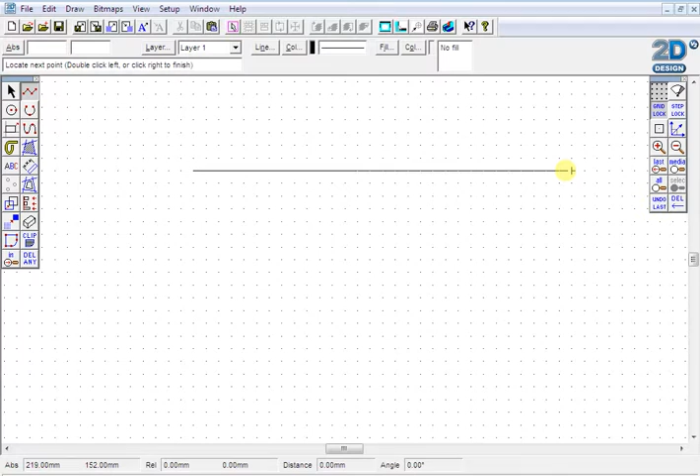And then I can come down by 5 millimeters. Just quickly finish off that rectangle, and then press escape on your keypad to finish off that line.

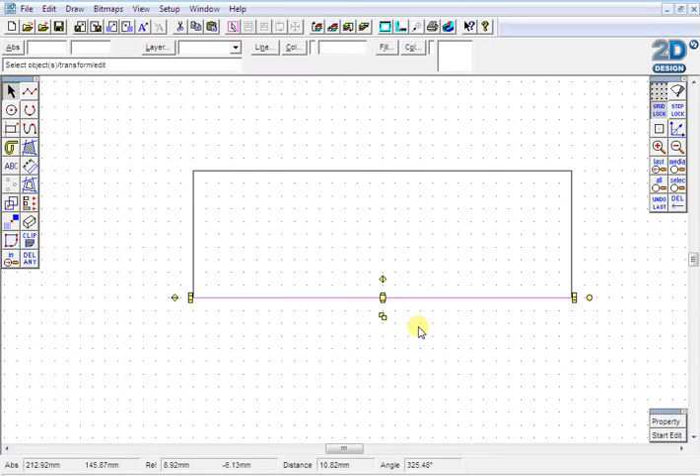Now, next step is to locate where that center point is on that bottom line. I tend to just click on the line and then place my finger gently on the screen to locate that point. Go to the line tool and click where my finger was previously.

I'd like you then to come up by 1 millimeter, press enter, and then escape to finish that line. And I'd like you to draw 2 circles that have their center located on the end of that line.

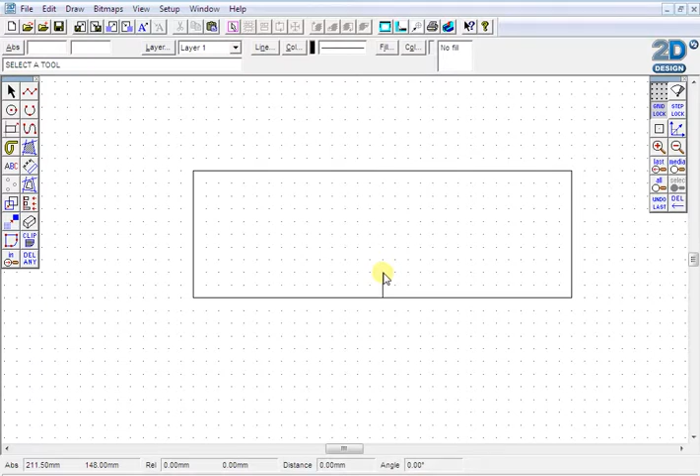So click and hold down the circle tool, click on the second one in, draw a circle with a given center and radius. Type in the radius to be 1.22, click OK, and click the center, the end of that line.

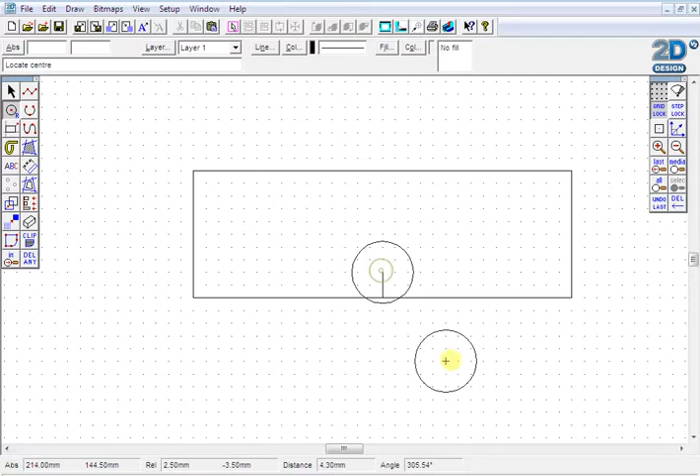Go back to the select tool, back to the radius tool, and change that radius from 1.22 to 2.92. Press OK and click in exactly the same place as before. Press escape on your keypad to finish that off.

Next up, I would like you to draw a line that is 2.5 millimeters above this baseline here. But instead of actually drawing the line, we can just use the contour tool.

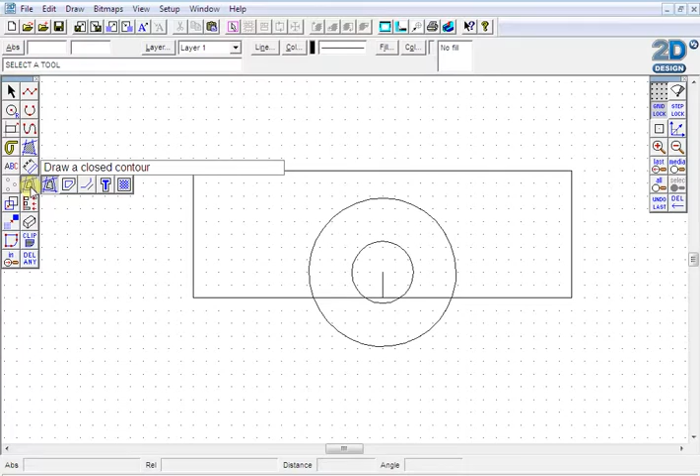Click and hold down on the contour tool, select the third one in, draw a contour parallel to a line, arc, circle or curve. Type in the distance to be 2.5 millimeters.

Click just above that horizontal line, that is just above. If you're too close to the circle, then it will contour that circle rather than the line that you want. And there we have it.

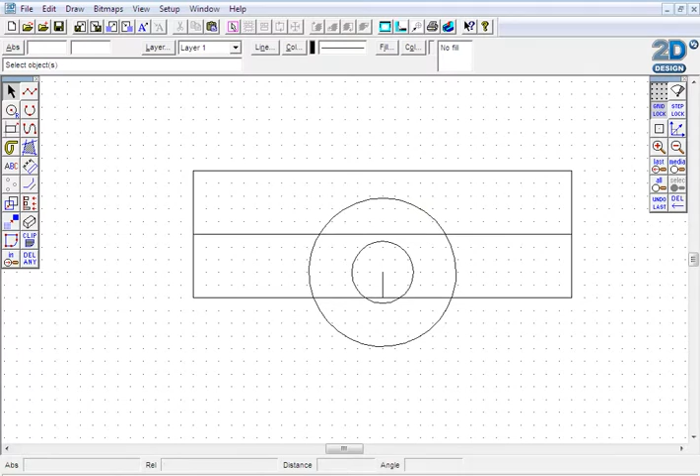Back to the select tool, and we can just trim the top of the circle there using the delete tool. Click and hold down on the delete tool, click the second one in, which is delete part of an object, and we can delete that top part of the circle and remove that horizontal line because that's no longer required.

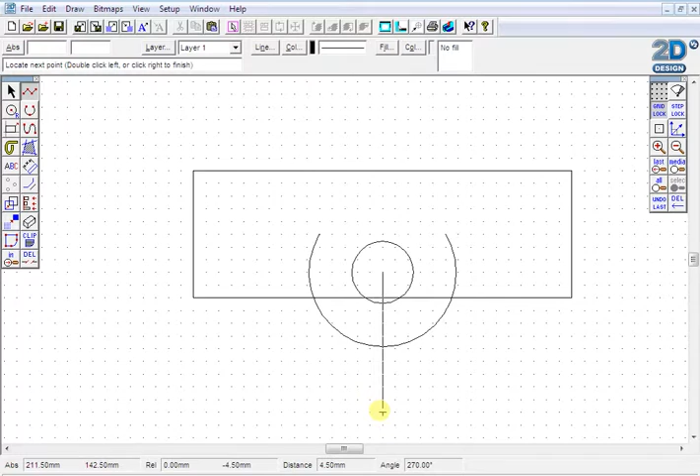Back to the line tool, several steps in this tutorial. The bottom of that vertical line, I'd like you to come down by 5.5 millimeters, and offset that line using the contour tool.

0.5 millimeters either side. So click just to the right hand side, just to the left hand side, and that's the center of our clip. Back to the line tool.

Click the end of that vertical line, that right hand line there, and come across by 1.5 millimeters. Press enter. Then come down, but don't click this time.

Come down by 2.5 millimeters, but then across by 1. I'll just show you that again. So we're coming along by 2.5 millimeters.

Don't click, and then with the arrows on your keypad, you come across by 0.5 millimeter, and then 1 millimeter. Press enter. Come back across by 1 millimeter, and then come just past that outer circle. Press enter and escape.

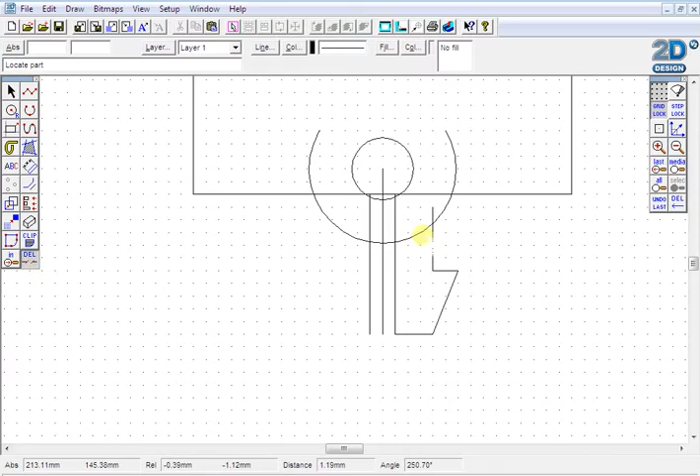We can then trim that line there and here, okay, except we don't need that anymore. And then we do exactly the same on the left hand side, starting at the bottom part of that vertical line on the left. Click, come across by 1.5 millimeters, press enter, come up by 2.5.

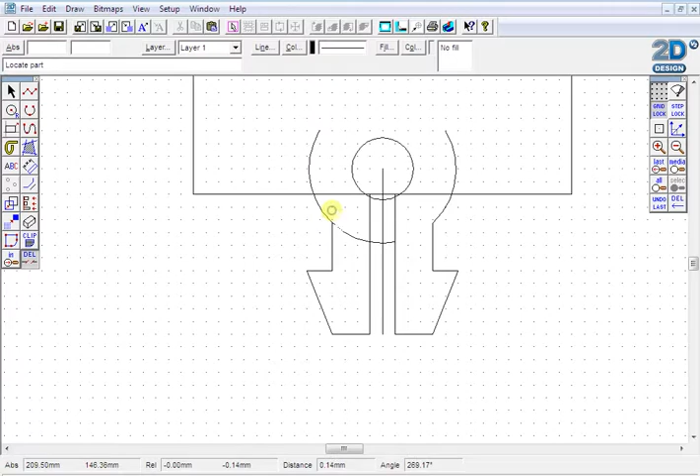Don't click, come across by 1, press enter, come back, and then join up to just past your outer circle. Press escape and delete that excess there, here, here and here.

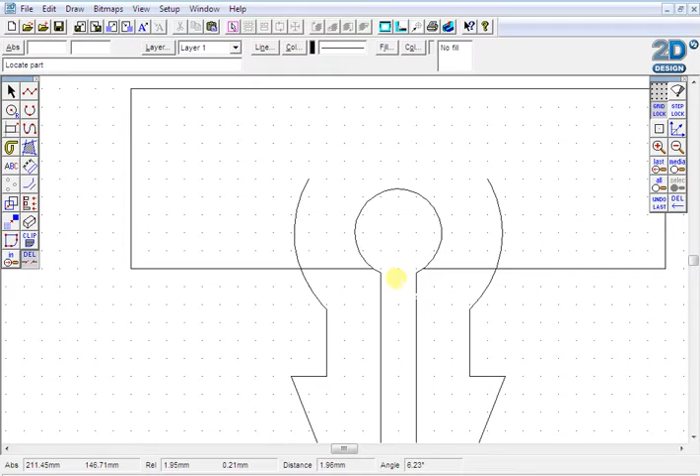Zoom in and focus on the middle part of your clip. We have some overlapping lines we just need to delete, very carefully. You may need to zoom in slightly further if need be. Delete the lines that I have deleted, like so, until you have that shape. Just double check that you've taken out those unnecessary lines.

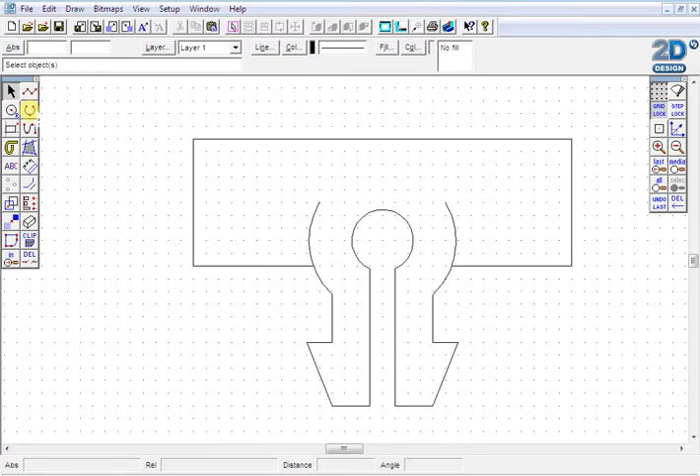The final couple of steps is to round off the corners, the top 2 corners, and then change the color. So let's round off the corners first using the arc tool. Click and hold down on the arc tool, select the final one along, which is draw a filleted arc between 2 lines, and I'd like you to type in 2 millimeters.

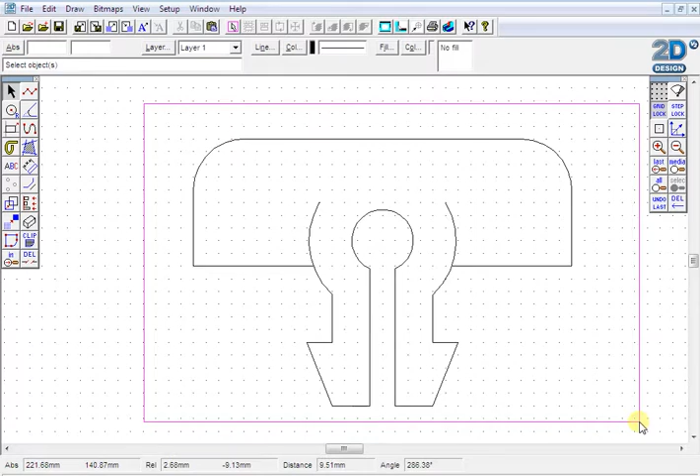Click the 2 lines that you want to round off, and there you have it. Go back to the select tool, select the entire drawing, change the line to fine, which it already is, and the color to red because we want it to laser cut all of this out. And that is your clip.

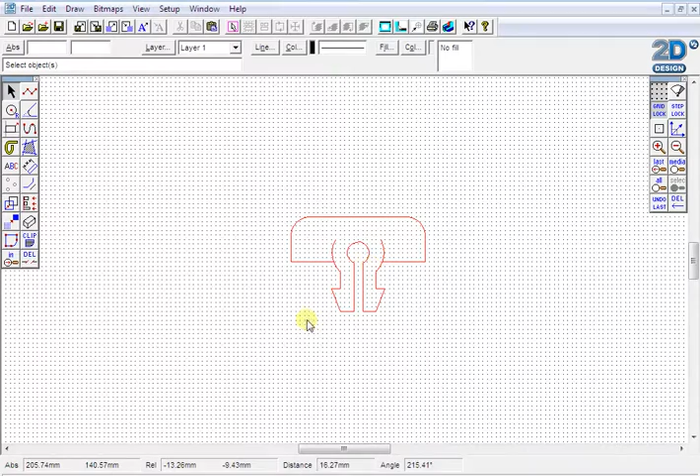Now you'll need several of these clips, so in order to produce several, there's no point in drawing them one by one. You can simply select one, hold down Control and G on your keypad. That groups all of these lines together, rather than them being individual separate lines that seem to move when you copy and paste your object.

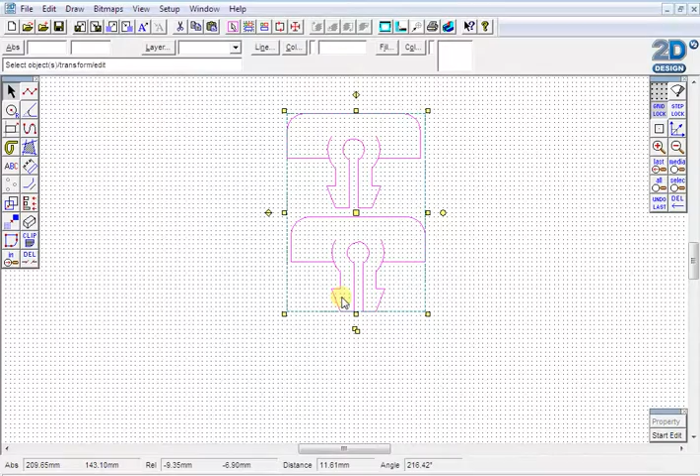Then you can very easily select your drawing, Control C on your keypad, Control V will paste. It will paste it on top at a slight angle or just to one side, and you can paste them next to one another. You can make a multiple selection of the 2, Control C, Control V on your keypad, and move them so they are directly next to one another.

Now, often in design and technology, and in the design world in general, in order to run a successful design business, it's all about efficiency. How efficient can you work? How efficient are you at using your time and the materials that you're working with?

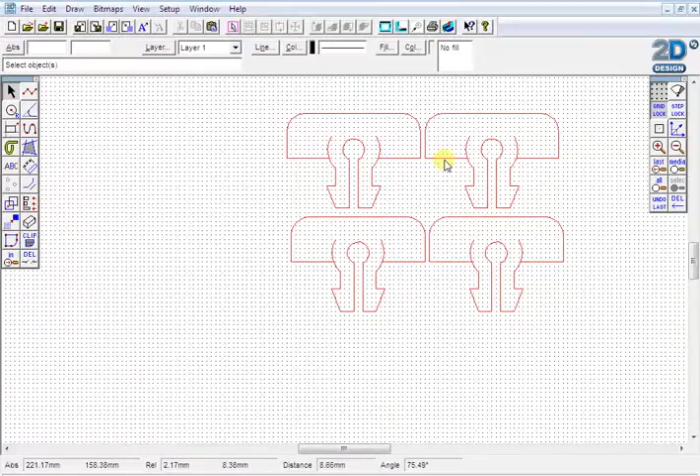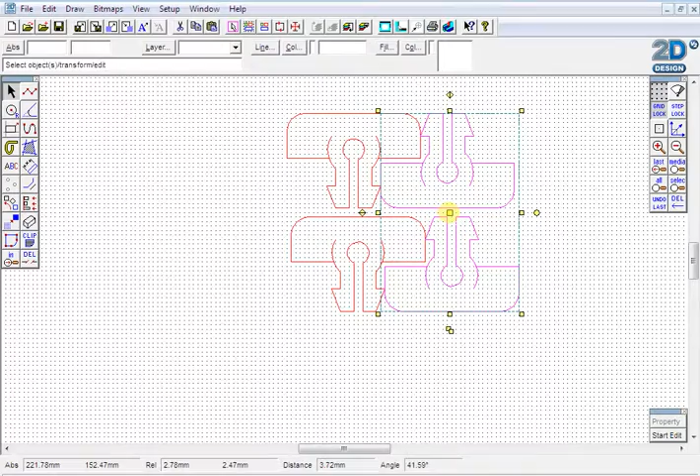You'll notice on this drawing there is quite a bit of wasted space in between each clip, so it might be worth selecting 2 of your clips: draw, transform, rotate, and rotate those by 180 degrees. Click that center point and you'll be able to flip them over, and slightly interlock the 2, making sure they're not quite touching. But we've saved an awful lot of that wasted space.

This form of organisation here is called tessellation. You may have covered this in maths. Copy and paste the required number of clips and arrange them on a page that is suitable for the laser cutter. I generally put my laser cut part in the top right hand corner of a page that has the dimensions of 900 by 600 millimeters. And that's it. Save your work.